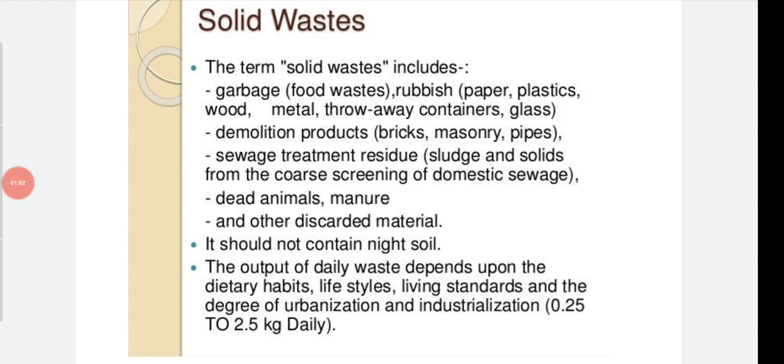And there can be dead animals, manure, and other discarded material. It should not contain night soil. Night soil means stool. Okay. The output of daily waste depends upon the dietary habits, lifestyles, living standards, and the degree of urbanization and industrialization. That is 0.25 to 2.5 kg daily. That is called solid waste. Okay.

Solid waste, if allowed to accumulate, is a health hazard, because if you are storing it in a particular place for a longer period, it decomposes and favors fly breeding. There will be fly breeding. It attracts rodents and vermin. The pathogens which may be present in the solid waste may be conveyed back to man's food through flies and dust. There is a possibility of water and soil pollution, and heaps of refuse present are unsightly.

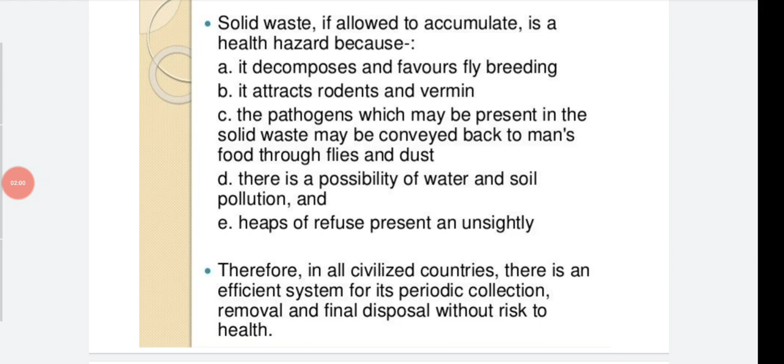So there may be pollution, there may be disease-causing agents. So we should not accumulate it in a particular place for a longer duration. It should be thrown away. Therefore, in all civilized countries, there is an efficient system for its periodic collection, removal, and final disposal without a risk to health.

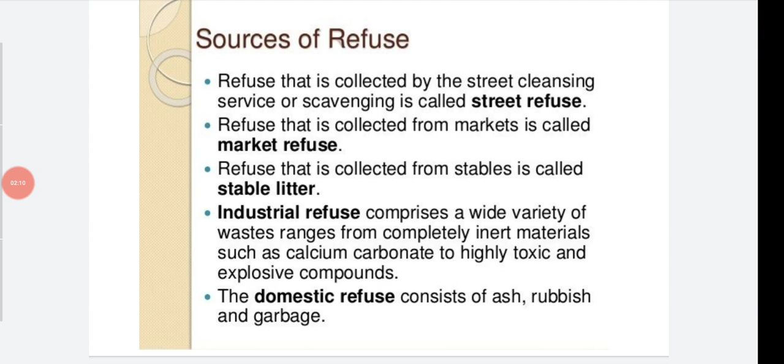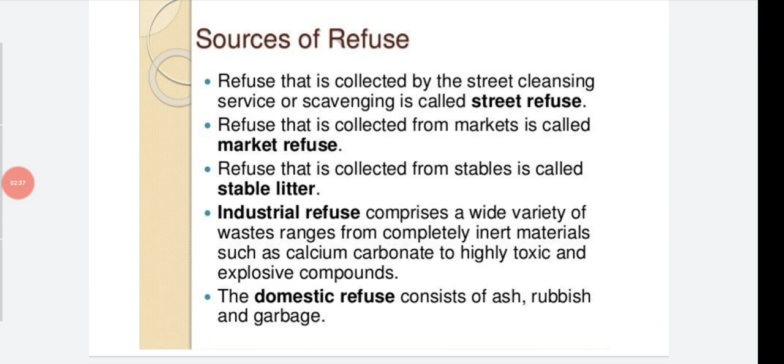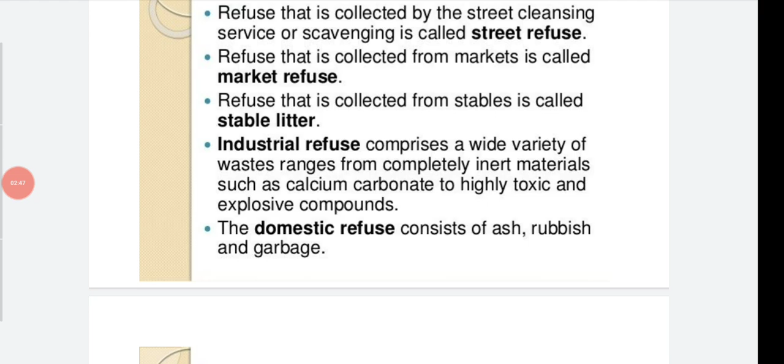So, which are the sources of refuse? First one, street refuse, that is, refuse that is collected by the street cleansing service or scavenging is called street refuse. Second one is market refuse, collected from markets, and stable litter, collected from stables. Industrial refuse comprises a wide variety of waste, ranging from completely inert materials such as calcium carbonate to highly toxic and explosive compounds. So whatever industrial wastes are called industrial refuse. The domestic refuse consists of ash, rubbish, and garbage. So those are the sources.

And the storage, second one: the galvanized steel dustbin with a close-fitting cover is a suitable receptacle for storage of refuse. In the dustbin you can store it. The capacity of a bin will depend upon the number of users and frequency of collection. The output of refuse per capita per day in India is estimated to vary from 1/10 to 1/20 cubic feet.

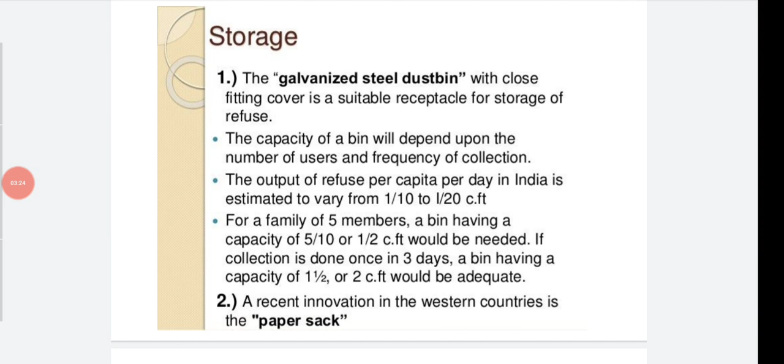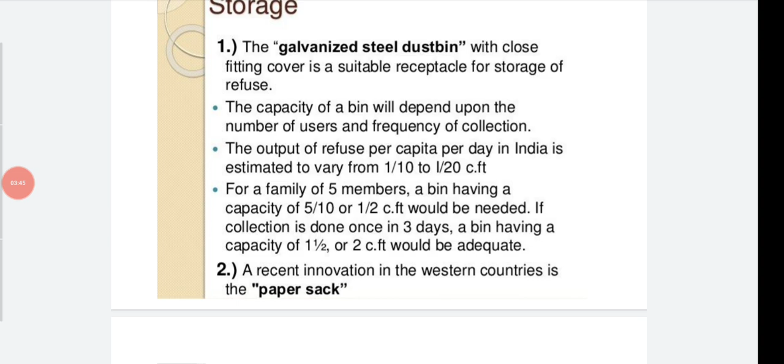For a family of 5 members, a bin having a capacity of 5/10 or 1/2 cubic feet would be needed. If collection is done once in 3 days, a bin having a capacity of 1.5 or 2 cubic feet would be adequate. So good storage should be there with the lid covering the bin. A recent innovation in the Western countries is the paper sack. The paper sack is used to store refuse.

Next, the third one is public bins. You can see them near the street. Public bins cater for a larger number of people. They are usually without cover in India and are kept on a concrete platform raised 2 to 3 inches above ground level to prevent flood water entering the bins. In bigger municipalities, the bins are handled and emptied mechanically by lorries fitted with cranes. So near the street, you can see these types of bins.

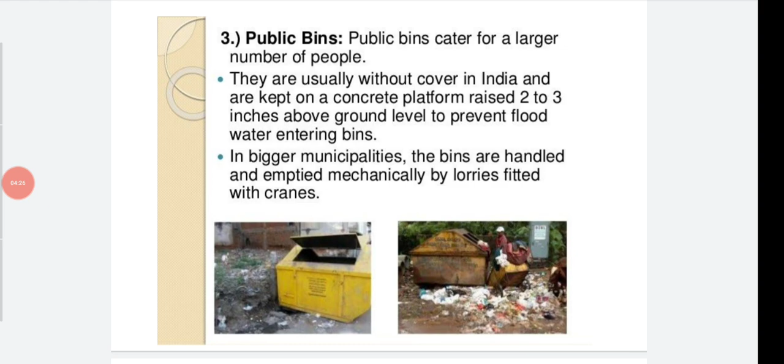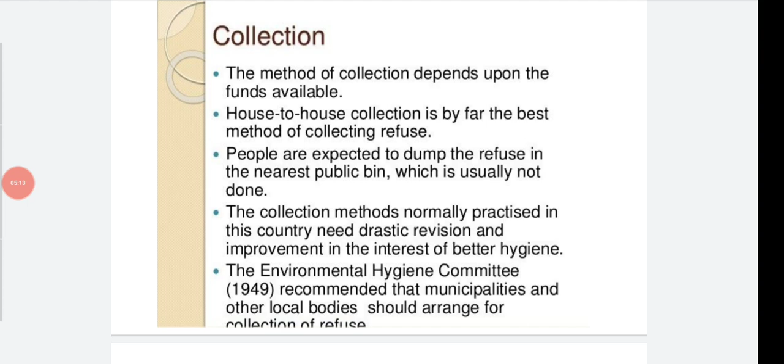The Environmental Hygiene Committee, set up in 1949, recommended that municipalities and other local bodies should arrange for collection of refuse.

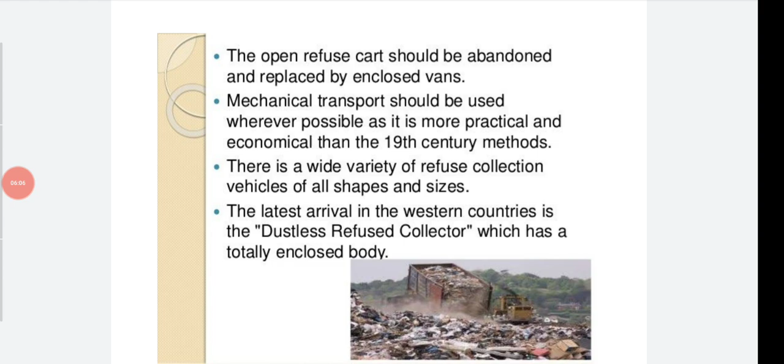The latest arrival in Western countries is the dustless refuse collector, which has a totally enclosed body. The collection body or truck collects the refuse and is enclosed tightly, so there will be no spillage of any dirt or refuse. That is called a dustless refuse collector.

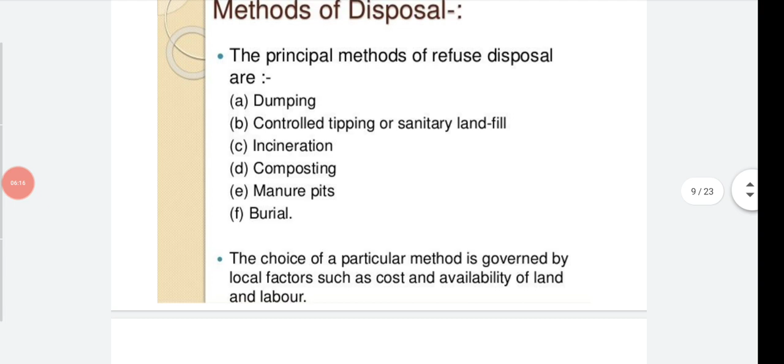So there are many methods of disposal. The principal methods of refuse disposal are dumping, controlled tipping (also called sanitary landfill), incineration, composting, manure pits, and burial. The choice of a particular method is governed by local factors such as cost and availability of land and labor. Based on the availability of these factors, the appropriate method is identified and used.

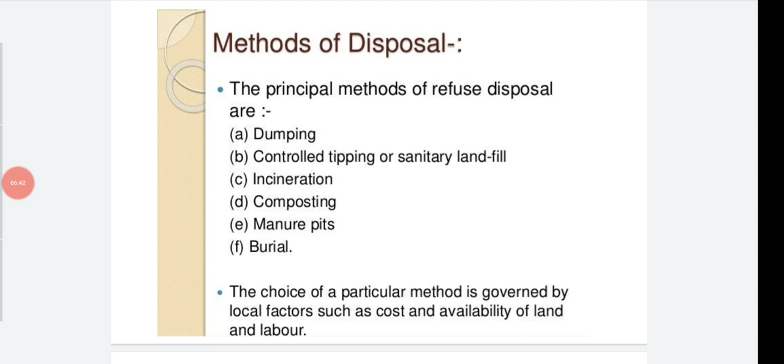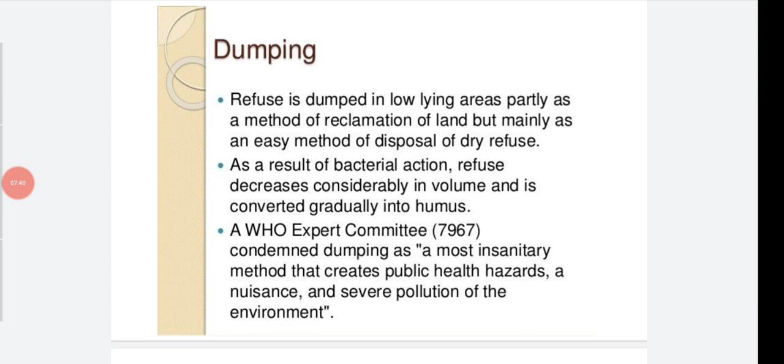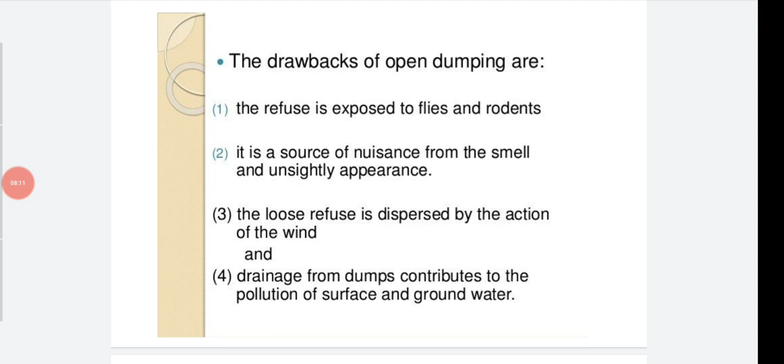The second method is controlled tipping. Controlled tipping, or sanitary landfill, is the most satisfactory method of refuse disposal where suitable land is available. It differs from ordinary dumping in that the material is placed in a trench or other prepared area, adequately compacted, and covered with earth at the end of the working day.

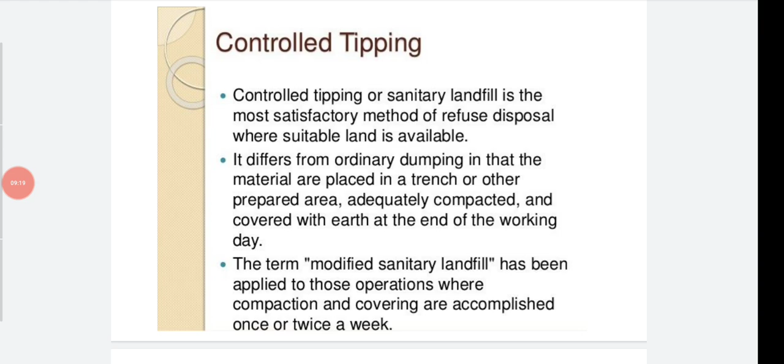The term modified sanitary landfill is applied to operations where compaction and covering are accomplished once or twice a week. So controlled tipping means you dump the refuse into a trench, and afterwards cover it with sand or soil, that is, earth. Covering the refuse with earth is called controlled tipping. Here, one more term is modified sanitary landfill: if the compaction or covering of refuse is done once or twice a week, it is called modified sanitary landfill.

Under this method there are three sub-methods. The first is the trench method, used where level ground is available. A long trench is dug out, 2 to 3 meters or 6 to 10 feet deep and 4 to 12 meters wide, depending on local conditions. The refuse is compacted and covered with the excavated earth. So in the trench method, you dig a hole about 2 to 3 meters deep and 4 to 12 meters wide, dump all the refuse, and then cover it with earth.

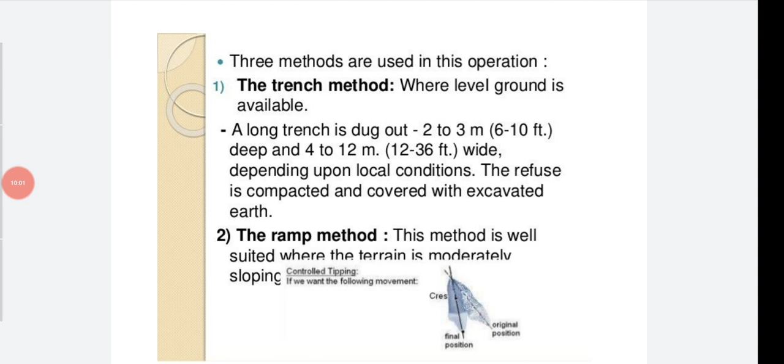The next method is the ramp method. This method is well suited where the terrain is moderately sloping. When the land is sloped, you use the ramp method.

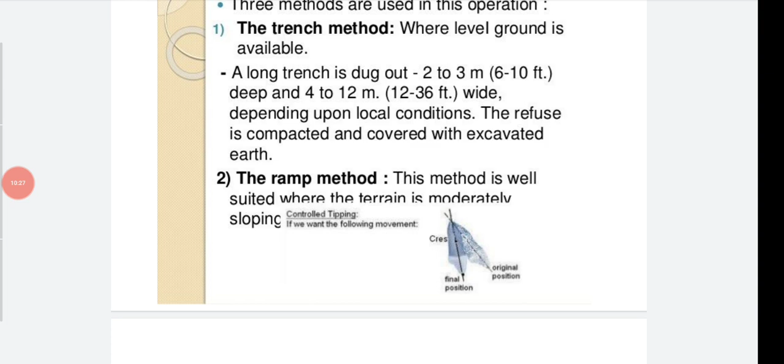You will dispose the refuse, then cover it with earth. That is the ramp method.

Area method: this method is used for filling land depressions, disused quarries and clay pits. If land is not used, or there's an old well or hole, you use it as a refuse disposal area, filling it with refuse and covering it with earth.

The refuse is deposited, packed and consolidated in uniform layers up to 2 to 2.5 meters deep. Each layer is sealed on its exposed surface with a mud cover at least 30 centimeters thick. Such sealing prevents infestation by flies and rodents and suppresses the nuisance of smell and dust.

So for each layer, first you put the refuse, then cover it with mud or soil. Again you put the refuse, then again cover it with soil. Such sealing prevents the smell, dust, or infestation of flies and rodents.

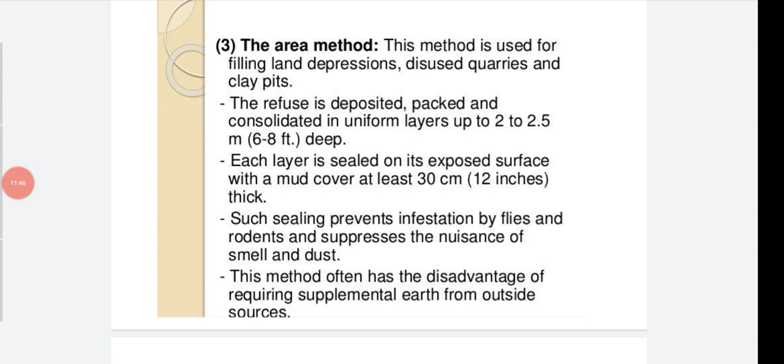This method often has the disadvantage of requiring supplemental earth from outside sources. So you need proper earth and area to do this area method.

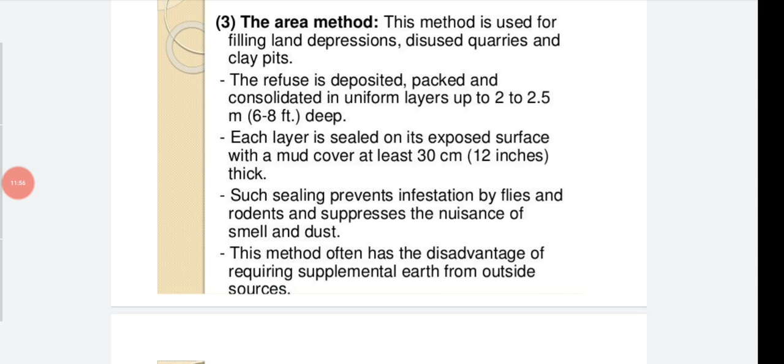Chemical, bacteriological and physical changes occur in buried refuse. The temperature rises to over 60 degrees Celsius within 7 days, which kills all the pathogens and hastens decomposition. When you cover it with the layer of mud and refuse, the temperature rises up to 60 degrees Celsius and all the pathogens die there.

Then it takes 2 to 3 weeks to cool down. Normally it takes 4 to 6 months for complete decomposition of organic matter into an innocuous mass. After 4 to 6 months, it converts into humus or manure.

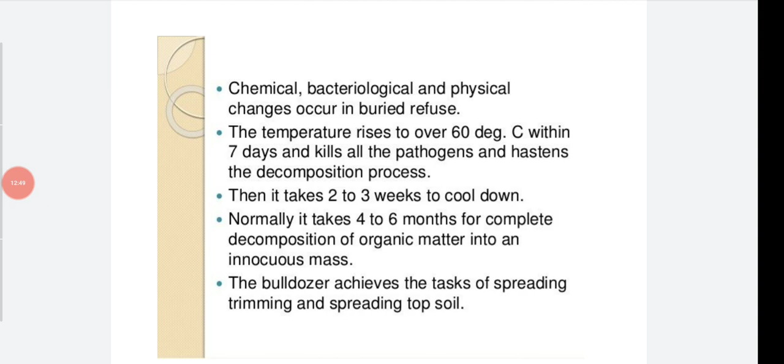The bulldozer achieves the task of spreading, trimming and leveling the topsoil. So you can use a JCB or a bulldozer to do this activity.

Next one is incineration. Incineration is burning or turning into ashes. Disposing hygienically by burning or incineration is the method of choice where suitable land is not available. If the land is not available, you can go into the incineration method.

Hospital refuse, which is particularly dangerous, is best disposed by incineration method. A preliminary separation of dust or ash is needed to separate all the refuse produced in the hospital. This involves heavy outlay and expenditure besides manipulative difficulties in the incinerator, and loss to the community in terms of money.

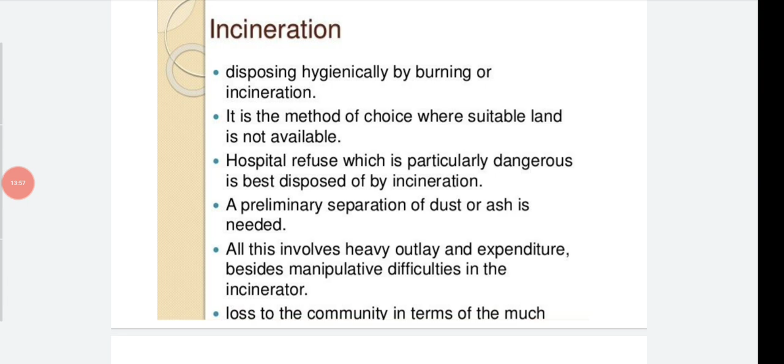Next one is composting. It is a method of combined disposal of refuse and night soil or sludge.

It's a natural process whereby organic matter breaks down under bacterial action, resulting in the formation of relatively stable humus-like material called compost, which has considerable manurial value for the soil. After composting, you use night soil or sludge to convert into manure or compost, then use it in the agricultural field.

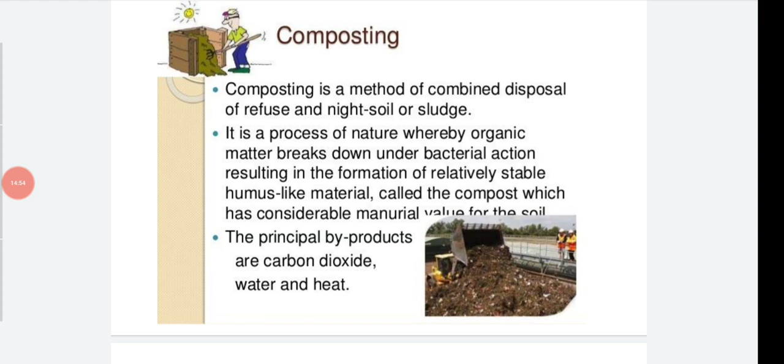The principal byproducts are carbon dioxide, water and heat, seen after the composting process.

The following methods of composting are now used. First is the Bangalore method, which is an anaerobic method. Second is mechanical composting, which is an aerobic method.

In the Bangalore method, trenches are dug 90 centimeters deep and 1.5 to 2.5 meters broad and 4.5 to 10 meters long. That is 3 feet deep, 5 to 8 feet broad, and 15 to 30 feet long, depending upon the amount of refuse and night soil to be disposed of.

The pits should be located not less than 800 meters from city limits, away from the city. Okay, this is the Bangalore method.

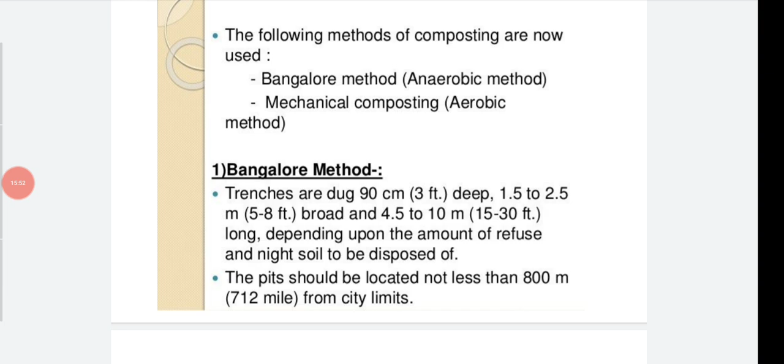Here, the composting procedure is as follows. First, a layer of refuse about 15 centimeter thick is spread at the bottom of the trench.

Over this, night soil is added corresponding to a thickness of 5 centimeter, or 2 inches.

Then alternate layers of refuse and night soil are added in the proportion of 15 centimeter and 5 centimeter respectively. First you add 15 centimeter refuse, again 5 centimeter night soil, again 15 centimeter refuse, and 5 centimeter night soil, like that.

This continues till the heap rises to 30 centimeter above the ground level, that is, 1 feet above the ground level.

The top layer should be of refuse at least 25 centimeter thickness, not night soil. Then the heap is covered with the excavated earth.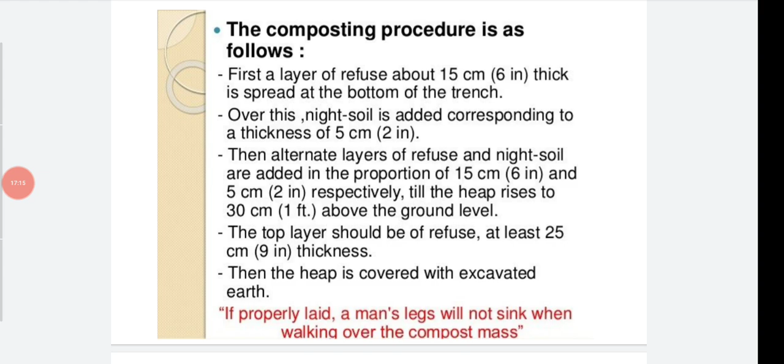Afterwards, the heap is formed and covered with earth or soil. If properly laid and tightly covered, a man's legs will not sink when walking over the compost mass.

Second method is mechanical composting. The refuse is first cleared of salvageable materials such as rags, bones, metal, glass and items likely to interfere with the grinding operation.

It is then pulverized in the pulverizing equipment, or grinded, to reduce the size of particles to less than 2 inches. The entire process of composting is complete in 4 to 6 weeks.

This is kept for composting, which may take 4 to 6 weeks. That is called mechanical composting: you take the refuse, remove the solid material, grind it, and start the composting.

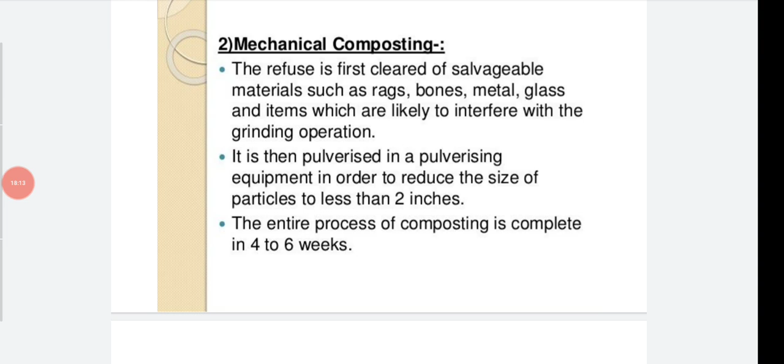Next one is manure pits. The problem of refuse disposal in rural areas can be solved by digging manure pits by individual householders, so each house can have a manure pit.

The garbage, cattle dung, straw and leaves should be dumped into the manure pits and covered with earth after each day's dumping. So whatever daily refuse is produced, you put it in and cover it with mud or soil.

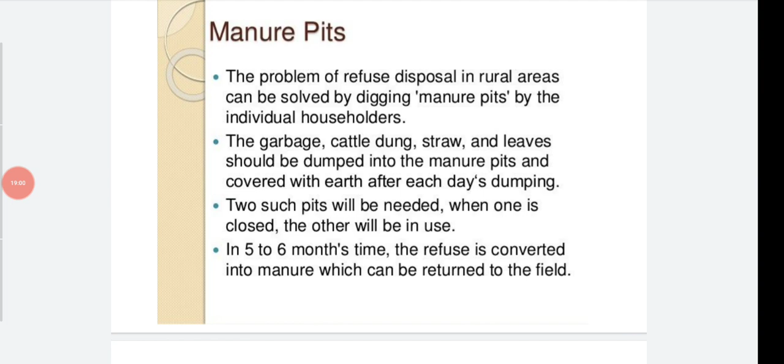Two such pits will be needed. When one is closed, the other will be used. In 5 to 6 months, the refuse is converted into manure, which can be removed and used in the agricultural field.

That is the manure pit method. Next, burial. This method is suitable for small camps. A trench 1.5 meter wide and 2 meter deep is excavated, and at the end of each day the refuse

is covered with 20 to 30 centimeter of earth. So a hole 1.5 meter wide and 2 meter deep is dug, all the waste is put in, and it is covered with soil.

When the level in the trench is 40 centimeter from ground level, the trench is filled with earth and compacted, and a new trench is dug out.

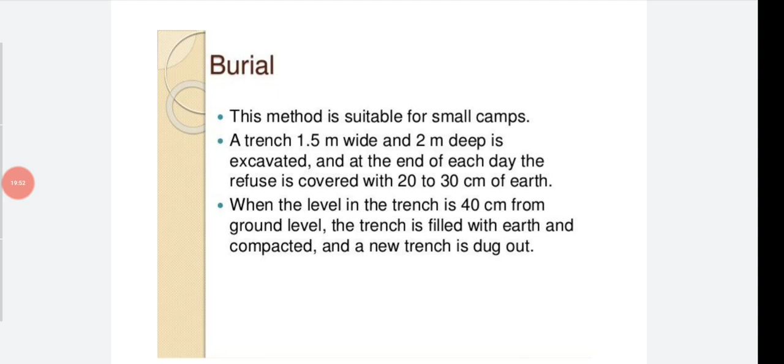So that's all about the waste disposal methods. We will see more in the next class.